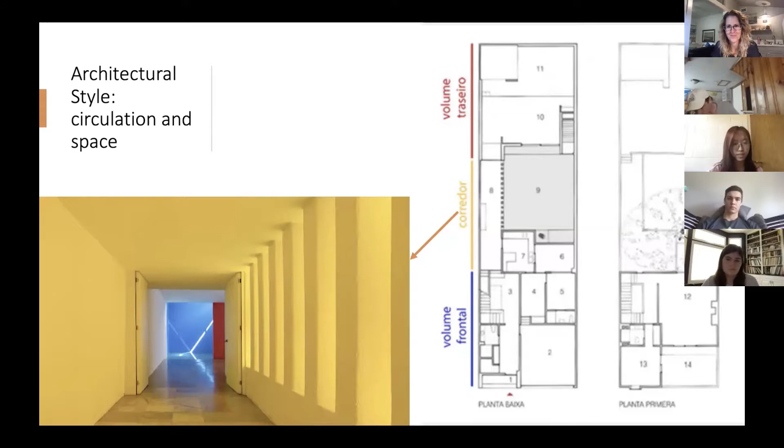Another feature in this house is the stairways. The stairway is made up of pine boards and leads to a door that is always closed. The stair is very sturdy, but its visual delicacy is such that to ascend it seems possible only if a gradual weightlessness was achieved.

Nowadays, most of the work by Luis Barragán has been turned into museums. When I did my research, I found a pretty interesting video called 'Dancing Through the Architecture of Luis Barragán.'

In 2018, Casa Luis Barragán hosted a body bending dance troupe who twist and move through the geometric building's colorful spaces and rooms. I really like this video because it shows how the light, colors, and dancers' bodies cooperate with each other in this site. It also illustrates a dialogue between the human body and nature, and reminds me of what we learned before in class about how blocks and concrete relate to the human body. That's pretty interesting. If you're interested in Luis Barragán's architecture, I strongly recommend this video.

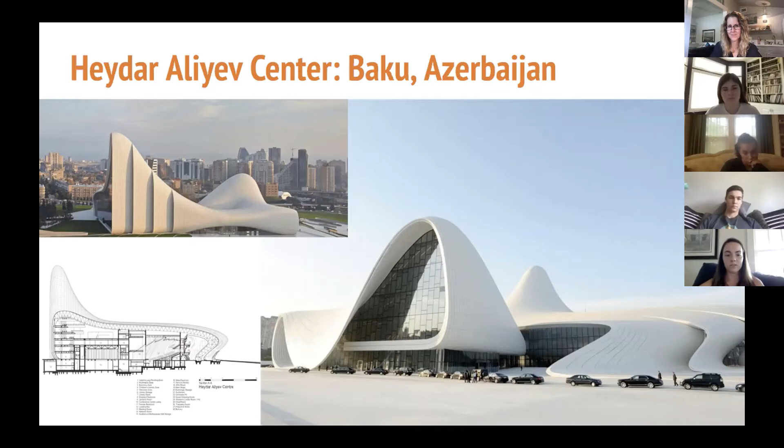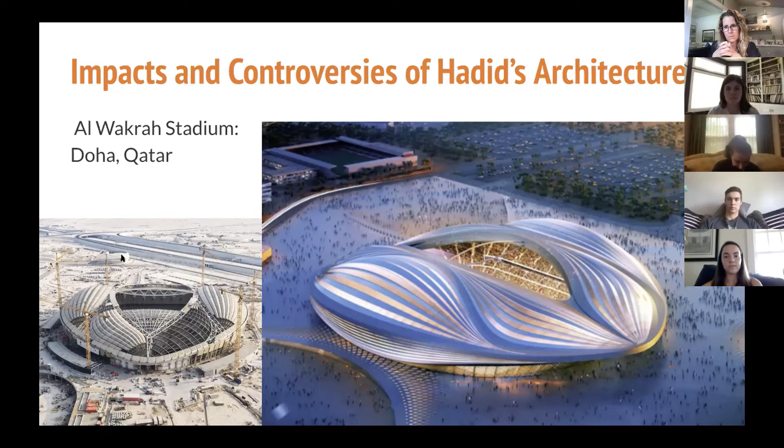Okay, and now for her legacy. Other notable buildings that we did not have time to discuss include, sorry about the pronunciation again, the Guangzhou Opera House in China, the Sheikh Zayed Bridge in the United Arab Emirates, and also the Eli and Edith Broad Art Museum at Michigan State University. So she even made her way into the United States and many countries throughout the world, and continents as well.

So she clearly is legendary, as you can see from her architecture. Her ability to shape concrete into this soft, fluid form is truly incredible. She shaped geometry's new identity and had such an important emphasis on nature and the environment, seen in her environmentally friendly buildings and her wave-like structures that continue to repeat in her work.

She was so focused on her work that she actually never got married. And despite her criticism, she had an immense amount of success as an Iraqi woman in a very white male-dominated field. I credit her for her confidence and strength throughout it all, because it must be really tough. She was also able to design 950 projects in 44 different countries, that's so many. That's truly incredible. Many of you, if you've ever traveled, may have seen some of these buildings.

And she was not only an amazing architect, but she also fought for her rights. She once said that architecture is no longer a man's world, that the idea a woman can't think three-dimensionally is ridiculous. She also said, "Your success will not be determined by your gender or your ethnicity, but only on the scope of your dreams and your hard work to achieve them." So that's it, and thank you guys. I hope you learned a lot.

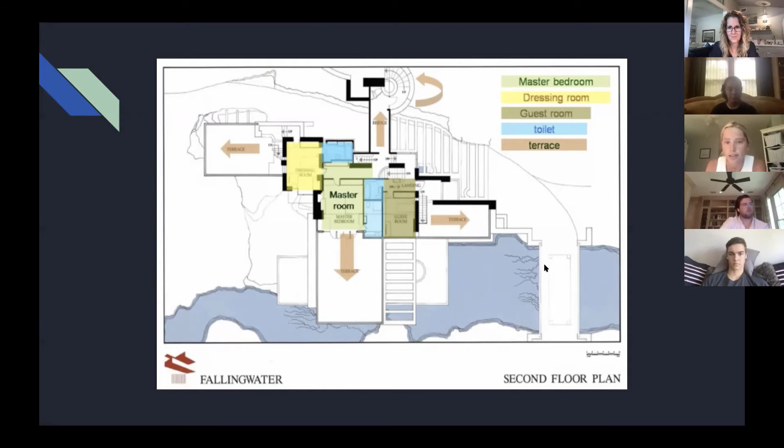I couldn't really find any good pictures that showed this, but you can try to imagine it—this is really open here, but the hallways of this house were very narrow and dark. He did this with the intention to intensify the experience once you got outside, so that getting into an open room or onto the terrace felt more like an opening or an expansion.

You can kind of tell from this photo, but some of the ceilings in the house were only 6 feet 4 inches tall. He did this so that your eye would go forward instead of up, so you're always looking towards the windows in front of you or towards the outside.

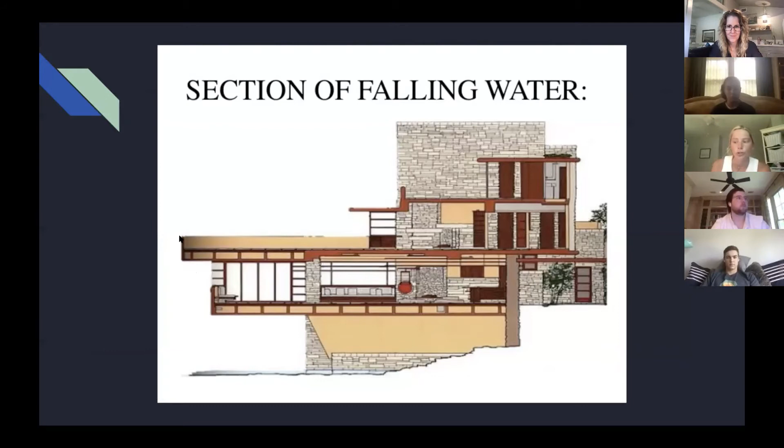As I mentioned before, the house is decorated with several cantilevered terraces—cantilevered meaning it extends out from the actual base of the home. All of these shoot out at right angles, and they added a sense of sculpture to the house while also providing yet another cue to the natural beauty that surrounds it.

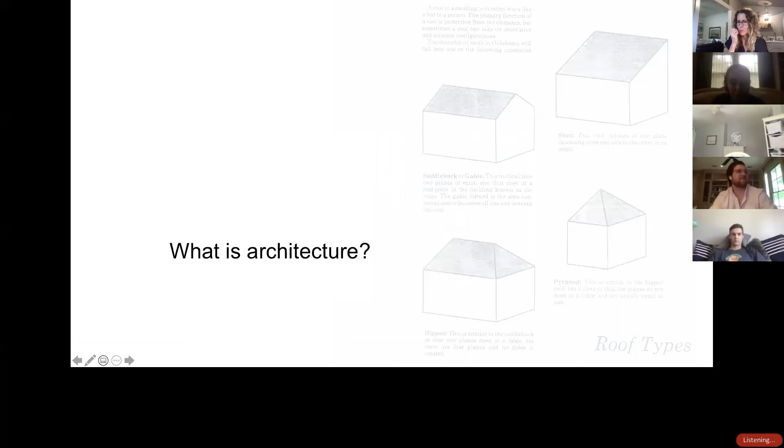Looks like we're going to have subtitles today. Maybe. In the time remaining, I want to take us through a quick jaunt from where we began to where we're finishing with the course.

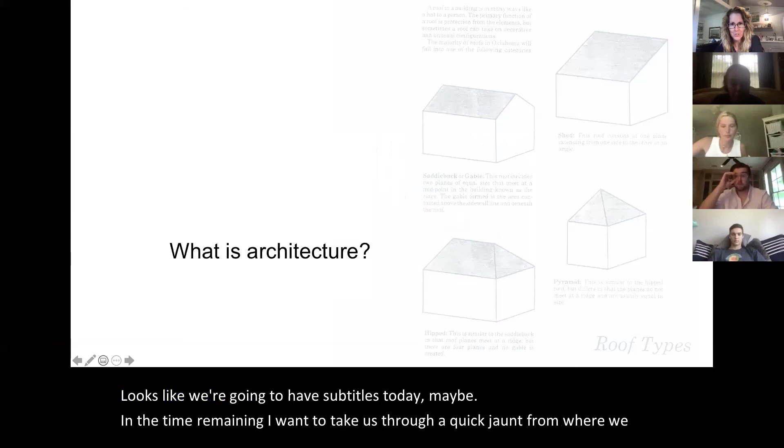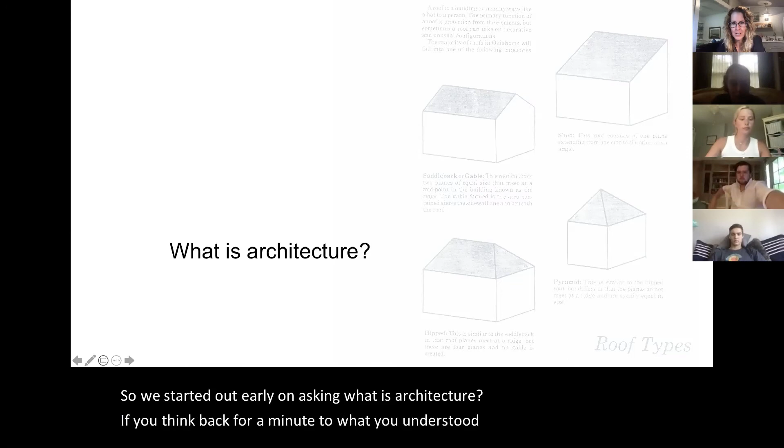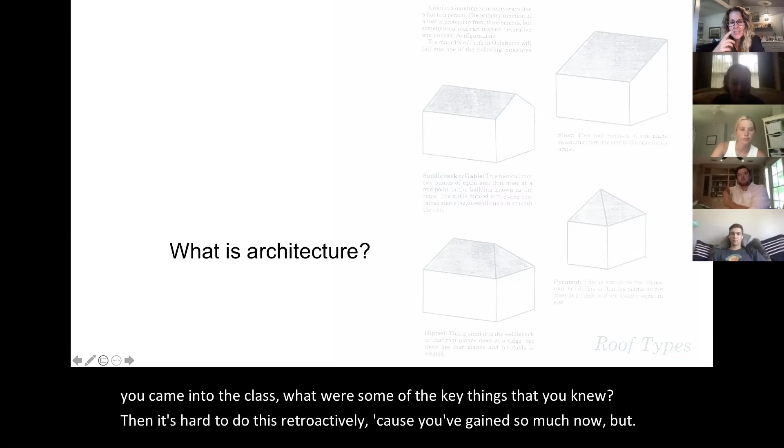So we started out early on asking, what is architecture? If you think back for a minute to what you understood about architecture when you came into the class, what were some of the key things that you knew then? It's hard to do this retroactively because you've gained so much now, but in the answer to what is architecture, do you remember what your first points were generally?

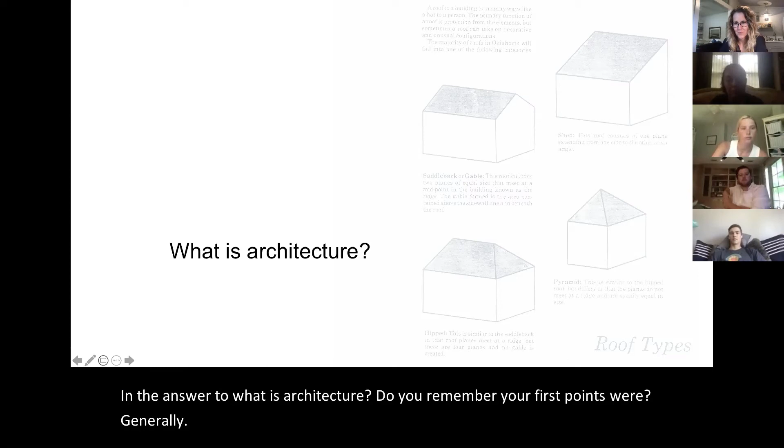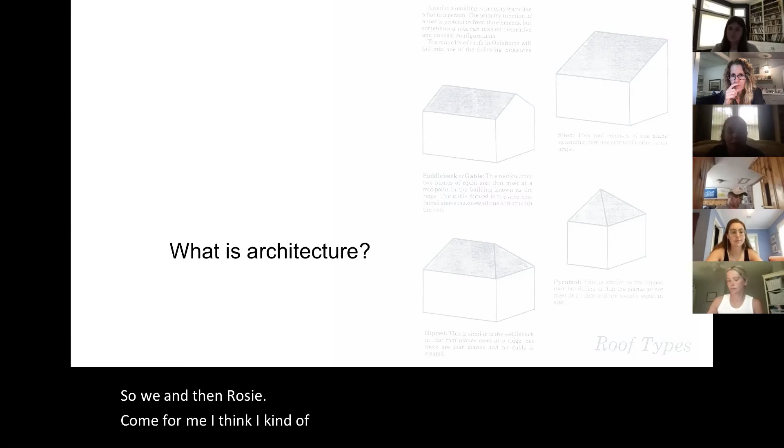Yes, Sophie, and then Rosie. For me, I think I kind of just thought about it as a place of shelter, and sometimes it could be more of an artistic element, but most of the time it was just more for basic purposes that served as a workplace or home.

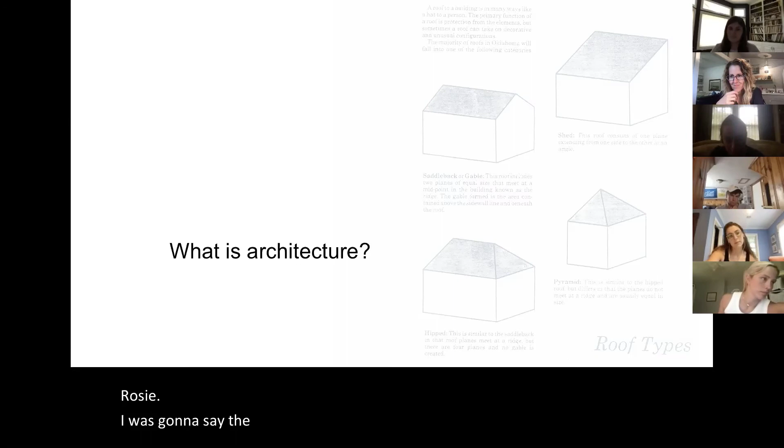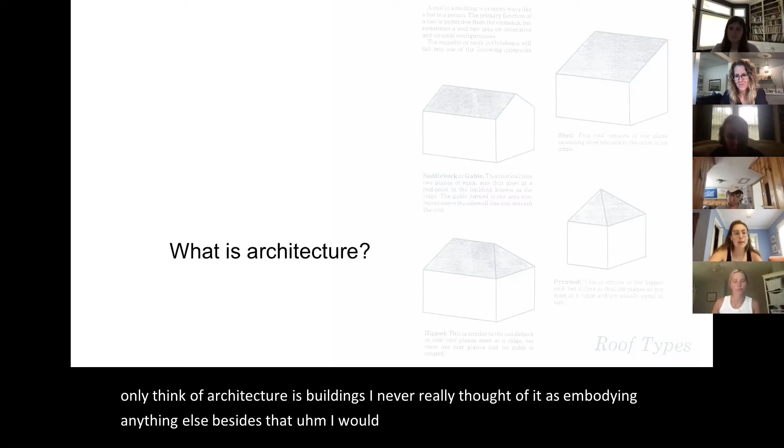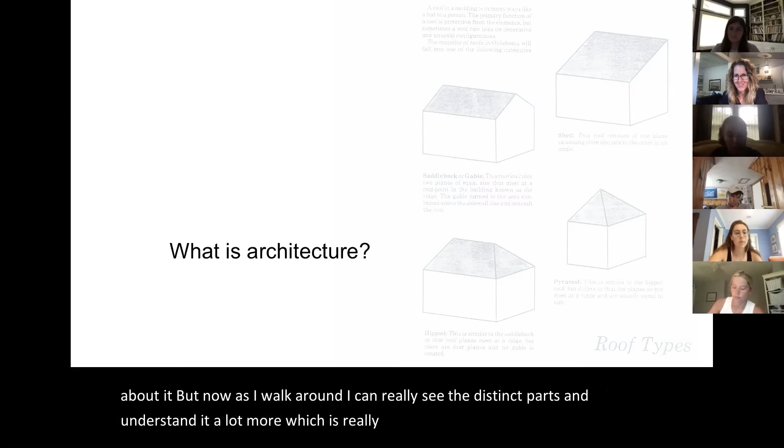Right, great. Rosie? I was going to say the same thing. I used to just think of it as a shelter, and I used to only think of architecture as buildings. I never really thought of it as embodying anything else besides that. I would just pretty much never look at the elements, I would just walk around and not really think about it. But now, as I walk around, I can really see the distinct parts and understand it a lot more, which is really cool. But yeah, before it was just pretty much a habitat, a shelter for a person that they live in. I used to not really think much more besides that.

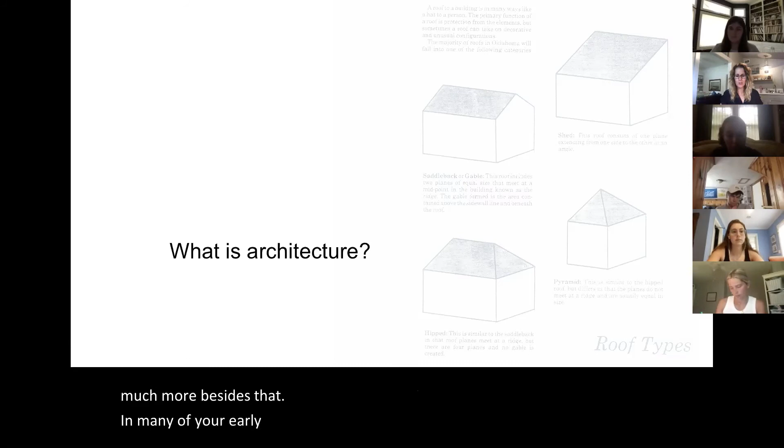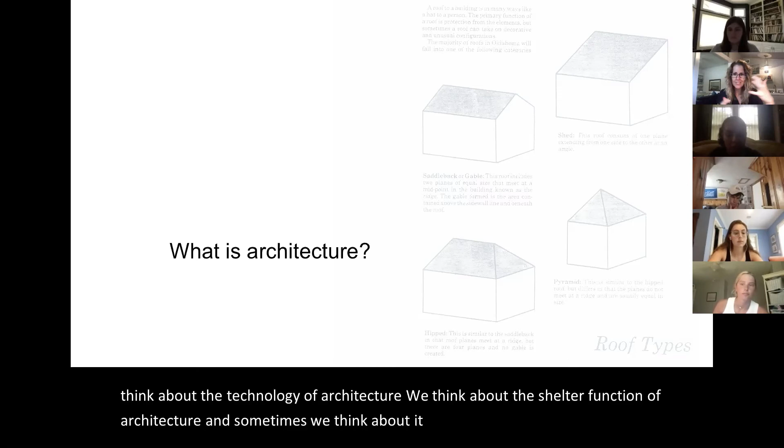In many of your early responses, there's often a tendency to think about the technology of architecture, the shelter function of architecture, and sometimes we think about it as art, but without really fleshing out what that kind of art is.

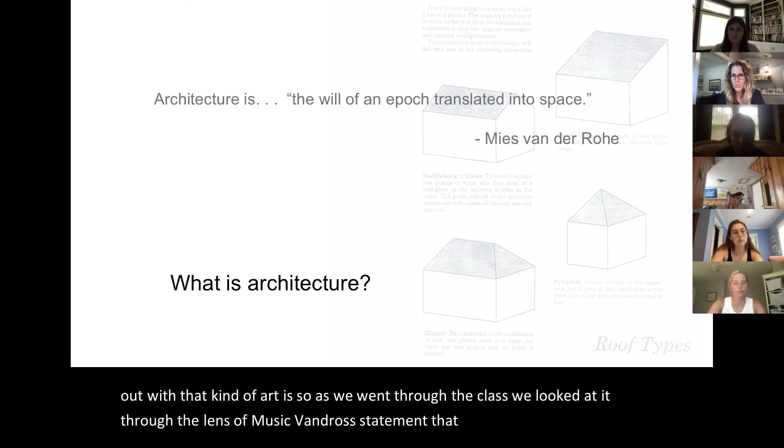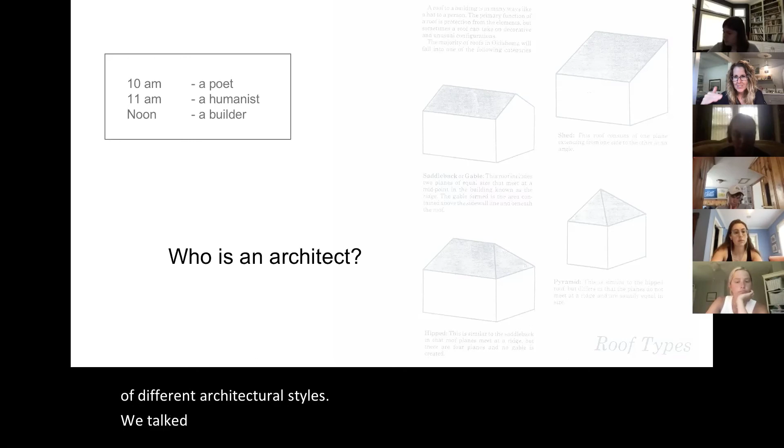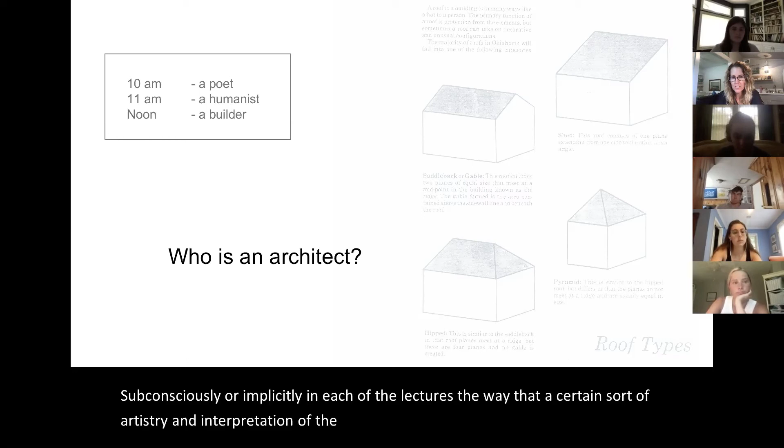So as we went through the class, we looked at it through the lens of Mies van der Rohe's statement that architecture is the will of an epoch or a time period translated into space. And we've seen that through a variety of different architectural styles. We talked about, subconsciously or implicitly in each of the lectures, the way that a certain sort of artistry and interpretation of the culture comes into the work of architecture. We talked about it through the lens of reaching out to the people for whom it's built, integrating their cultural traditions. And then we talked about the tech.

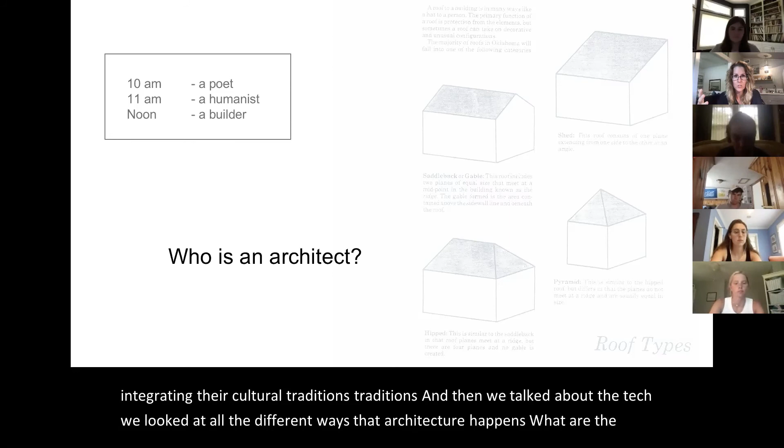We looked at all the different ways that architecture happens. What are the techniques? What are the engineering tools, physics? What's involved in creating architecture in a material dimension? So along the way, we've been thinking about what architecture history is, what it can do.

What are your answers to that question now? What is architectural history? Yeah, Ellen. I think it's like an expression of a culture and their history, and them making it in a way so that it can be preserved and experienced by others in the future. Yeah, excellent, excellent. Lucas.

It's not really a direct answer to the question, but whenever I see architectural history, I just gravitate towards preservation, because we've lost so much of it that we're not able to even really address the architectural history if the architecture still isn't there. Yeah, great point. We've seen that in so many cases, things that have been lost, or understanding that's lost, or histories that are lost, or things that we're not even looking at because it's lost. Or we just don't have time in the class. There's also that possibility. But yes.

Matthew, did you have your hand up, or was it no? Okay, great. We'll keep going.

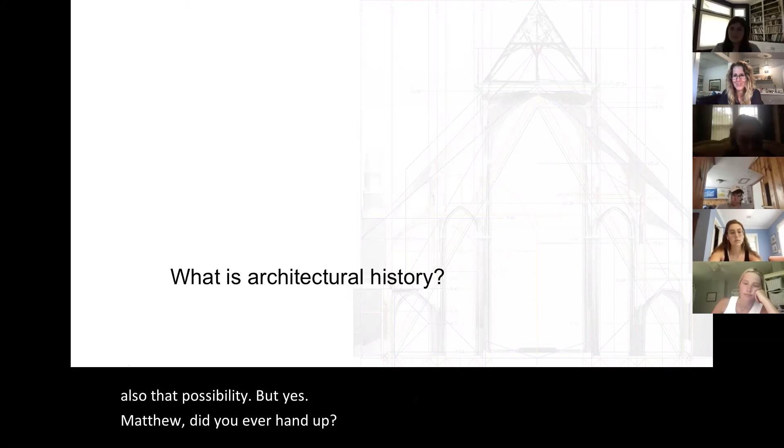Throughout the process, we've been thinking about why architecture matters. And in each of your presentations, you have come to really great conclusions about why that's the case.

From today, thinking about how do we build more sustainably? How do we build in response to the places we're in, whether that's through design elements that reference a culture, through color, through technique.

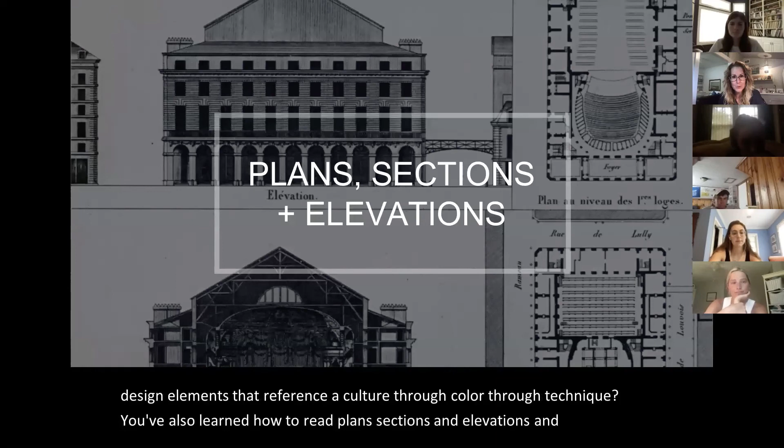We've also learned how to read plans, sections, and elevations. That's a tool you bring forward with you no matter what you do in your life and career, if you decide to build a house in your future, or you simply just need to orient yourself in space.

So now just a quick overview. We went through the awkward teen years of the ancient pyramids as they moved from a mastaba into the glorious pyramids of Giza as we think about them now.

We looked at the marvels of chthonic architecture, both in Petra, Persepolis, and elsewhere, thinking about how architecture can be tectonic in the case of things like the pyramids, and chthonic in other regions of the world where cliffs and valleys are more predominant.

We looked at mud and earth as architectural materials to create buildings beyond what at least I thought was possible before learning about them, and how they reflect the culture, how they reflect the materiality in a place that looks like there aren't many building materials. There certainly always are.

We thought about carpentry and building traditions, specifically through the lens of a series of temples and shrines in Japan and their reference to the city of Chang'an in China.

Looked at pattern and abstraction and the Byzantine plan and the layering of culture and the layering of expression, from religious expression to just a human desire to create a space that says more than we're able to technically communicate with words.

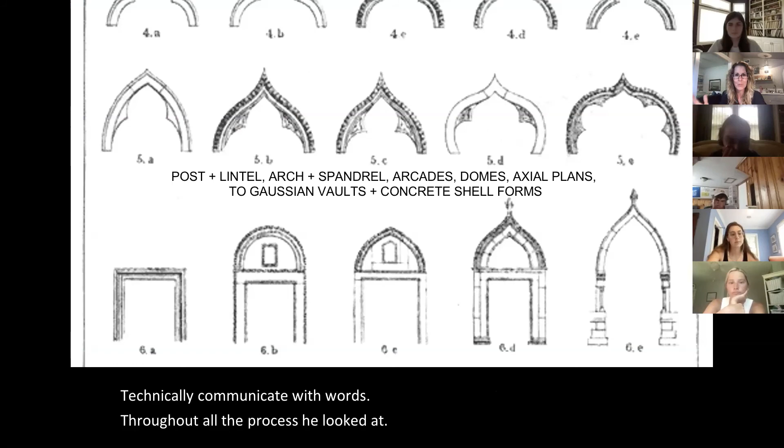Throughout all the process, we looked at the building of architecture: post and lintels, arch and spandrel, arcades, domes, axial plans, Gaussian vaults, concrete shells.

We stopped to think through the construction of race and its relationship to architecture and the call for equity, from everything from the current protests to the architecture of sugar.

And we fast forwarded through the evolution of the cathedral plan, from the Romanesque to the Byzantine to the Gothic.

What I'm starting into now are the points that will be on your exam. So we'll look at this later part. You won't have to do the Romanesque because you've already done that, but the Gothic happened in this latter part of the session.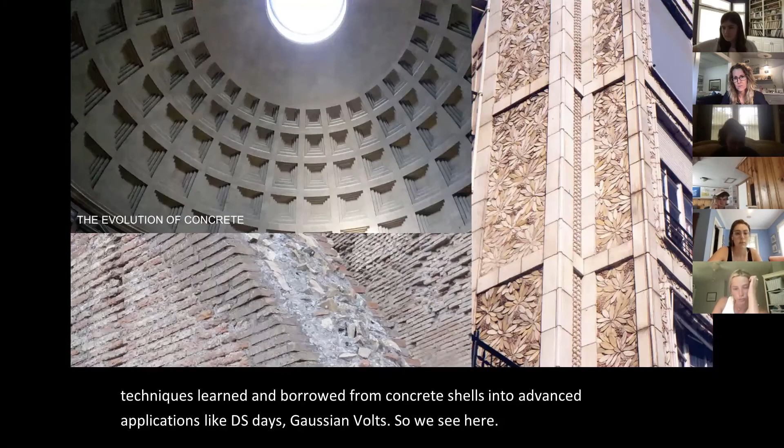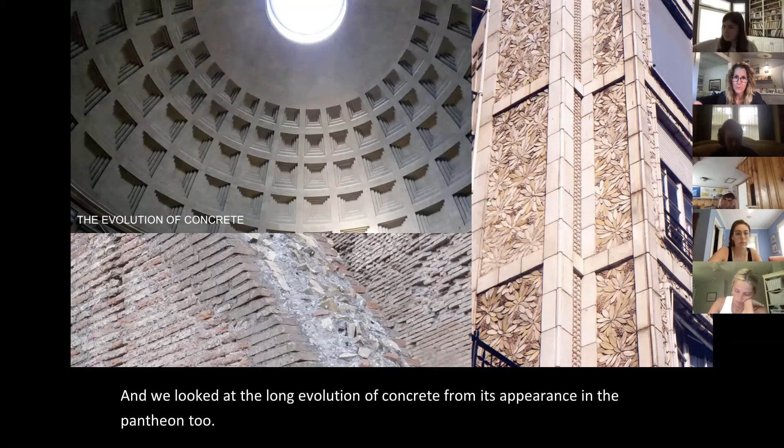And we looked at the long evolution of concrete from its appearance in the Pantheon to the work of Perret and Maillart in really advancing what concrete could do in the early 20th century.

And then today, to wrap up, we are going to look briefly at textiles, tensiles, and the Atoms for Peace project.

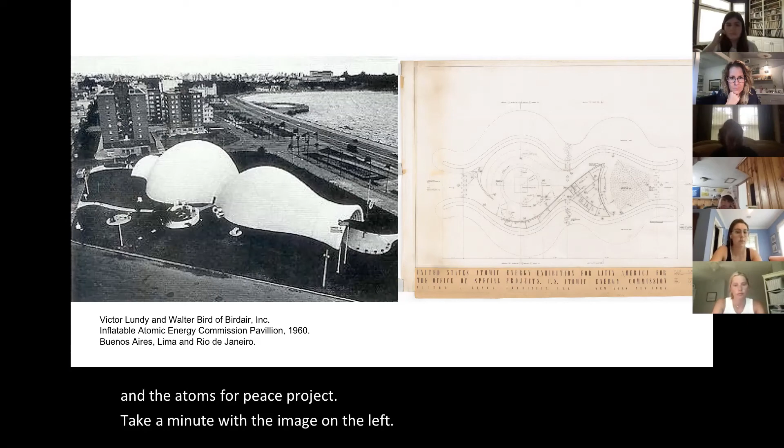Take a minute with the image on the left. What do you see when you look at it? What does it remind you of, if anything?

Meredith said it kind of looks like if you took a vase and just cut it in half and laid it on its side. Ellen agreed, saying she was going to say the same thing, that it looks like a vase that was knocked over.

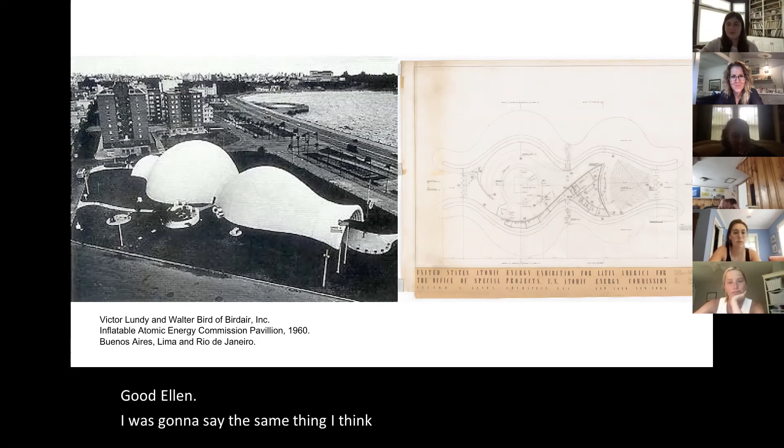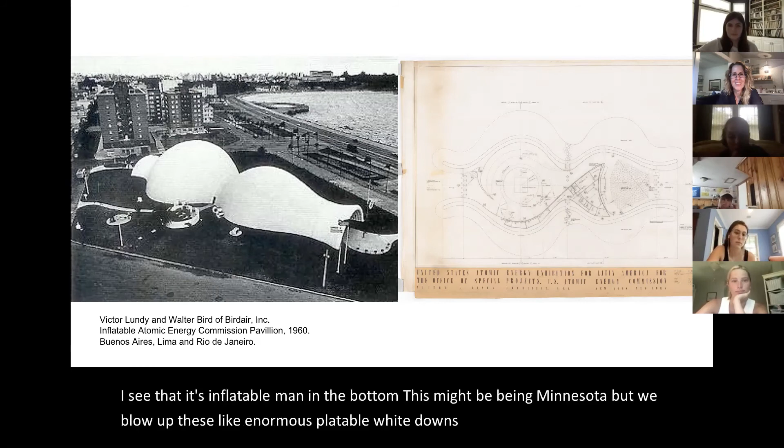Lucas said he sees that it's inflatable down on the bottom, and mentioned that in Minnesota they blow up enormous inflatable white domes over football fields in the winter and heat them to play sports, which this reminds him of, except theirs aren't as curved, more like a giant igloo.

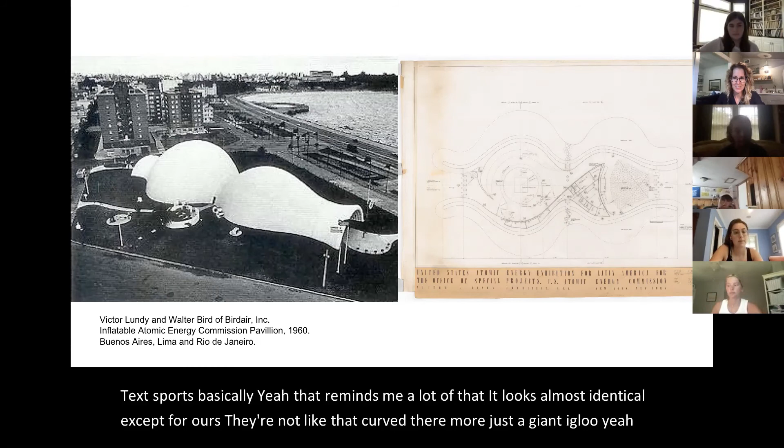So we have this vase structure, and I'm guessing, Ellen and Meredith, that comes in the form of the curvature of this structure.

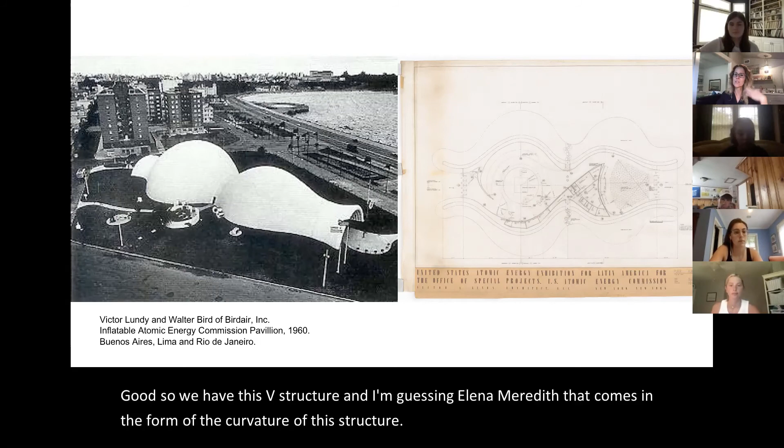Is there anything else that you see in this building? There are a million things you could see in this building, but when you think about the form, does it remind you of anything else?

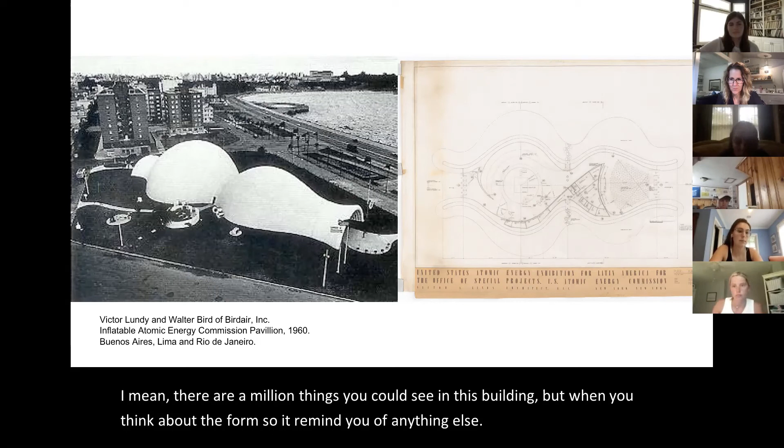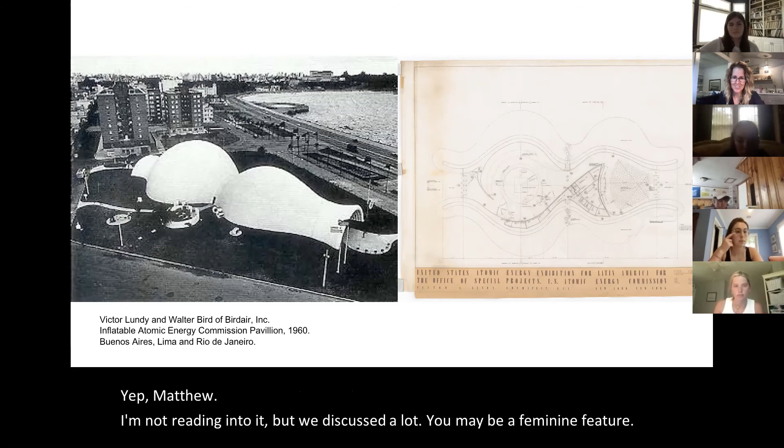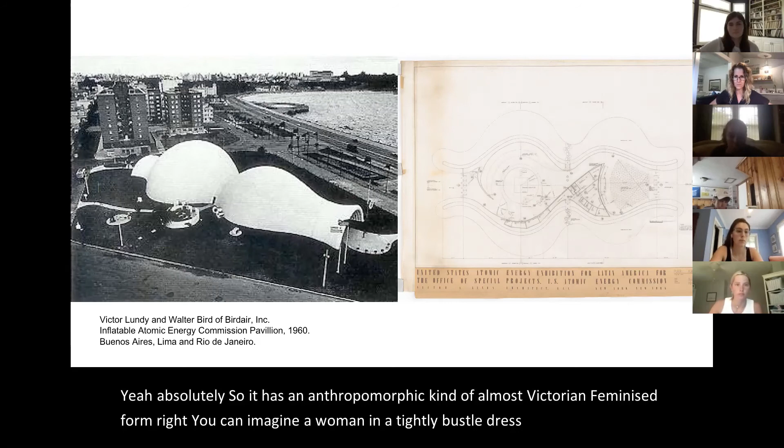Yeah, Matthew, I hope I'm not reading into it, but we've discussed a lot. It may be a feminine feature. Yeah, absolutely. So it has an anthropomorphic, kind of almost Victorian feminized form, right? You can imagine a woman in a tightly bustled dress with a tight waist and this skirt coming out of the bottom. Absolutely, and all of those readings are intentional.

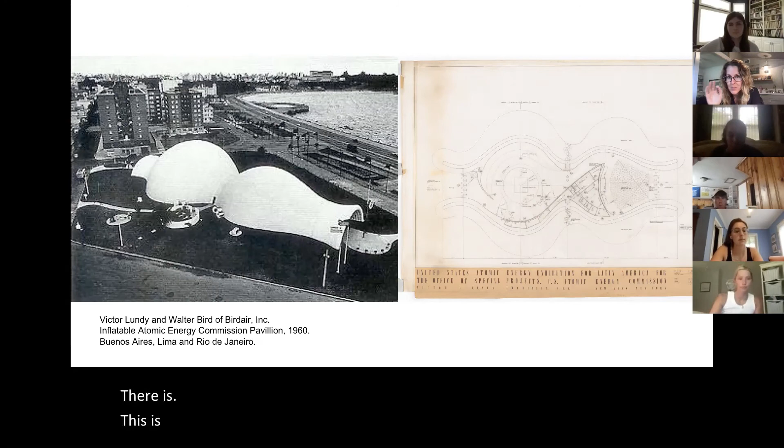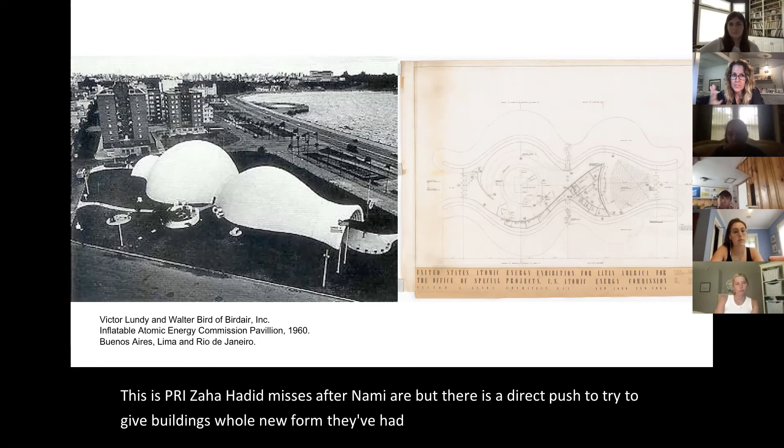This is pre-Zaha Hadid, this is after Niemeyer, but there is a direct push to try to give buildings a whole new form than they've had before, moving away from the squares and rectangles that you see in the background of the image to something entirely new, something perceived as almost living.

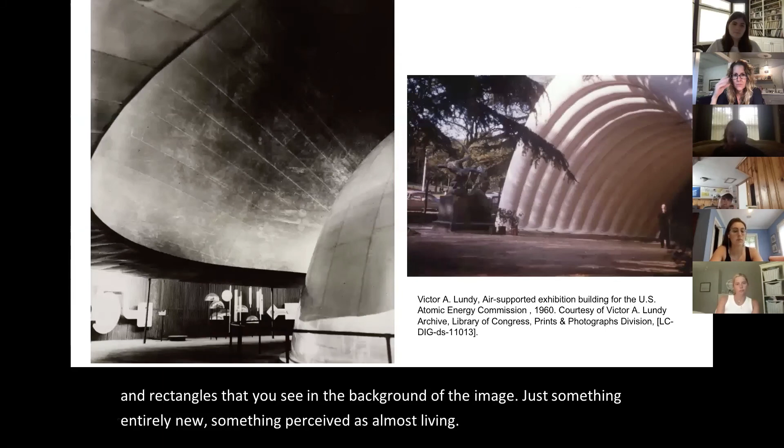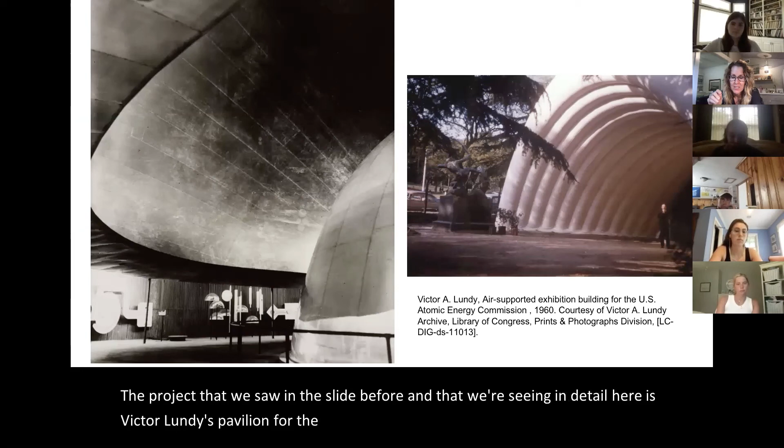The project that we saw in the slide before and that we're seeing in detail here is Victor Lundy's pavilion for the Atomic Energy Commission, designed to showcase the Atoms for Peace project. Have you ever heard of the Atoms for Peace project?

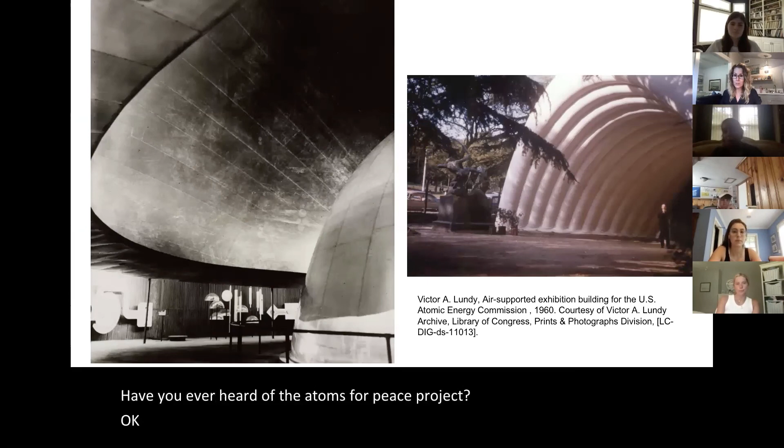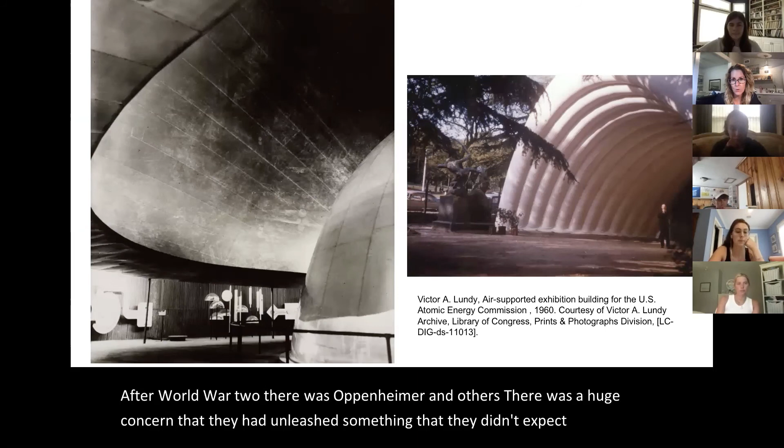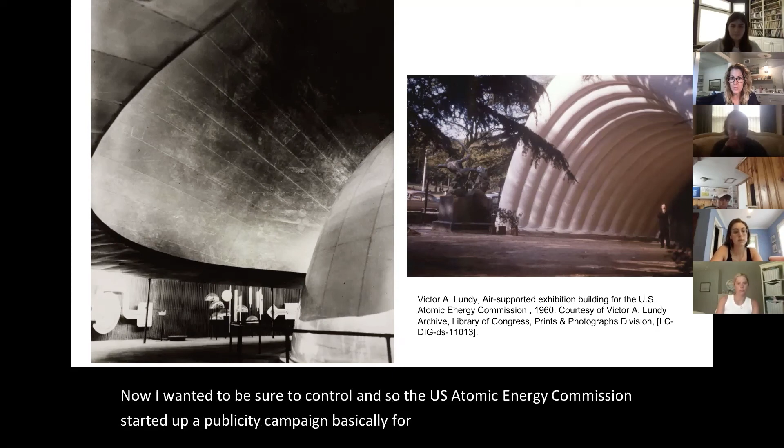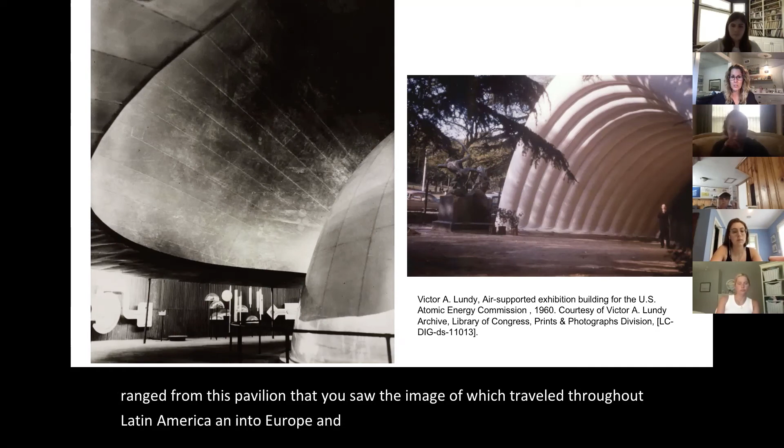After World War II, there was Oppenheimer and others, there was a huge concern that they had unleashed something that they didn't expect, and now wanted to be sure to control. So the US Atomic Energy Commission started up a publicity campaign basically for the good uses of atomic energy. This ranged from this pavilion that you saw the image of, which traveled throughout Latin America and into Europe. The idea behind the pavilion was to show the power of atomic energy in scientific application, as well as domestic applications.

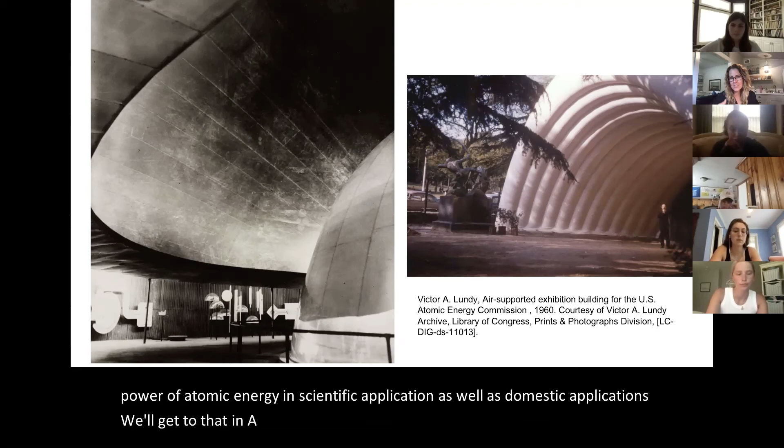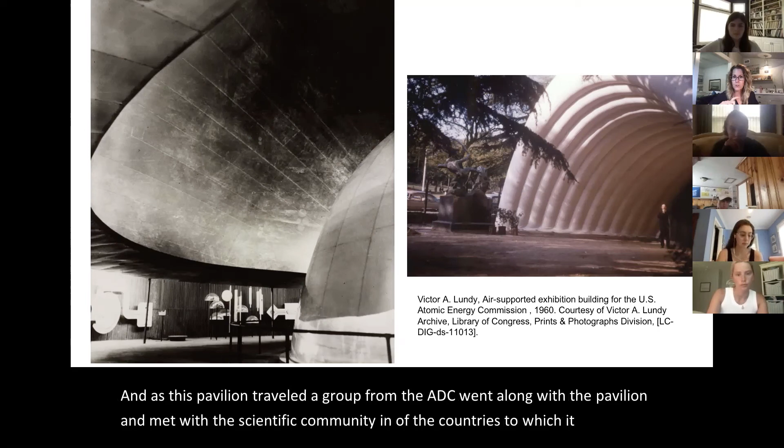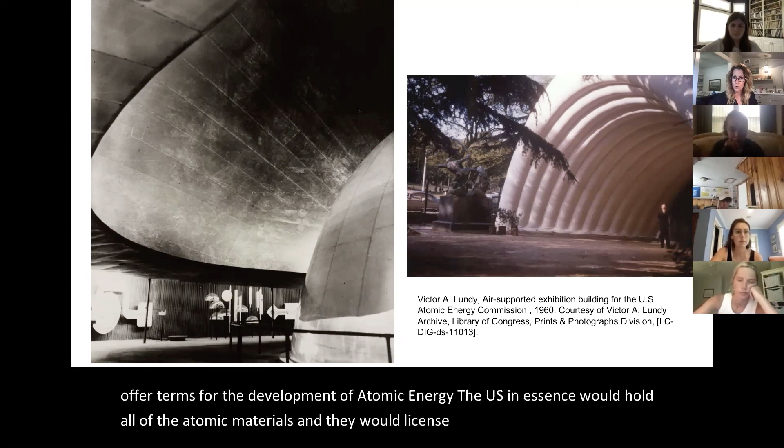As this pavilion traveled, a group from the AEC went along with the pavilion and met with the scientific community in each of the countries to which it traveled to offer terms for the development of atomic energy. The US, in essence, would hold all of the atomic materials and they would license them to the different states who were willing to get on board. It was an early way of trying to control proliferation and to put America at the center of that proliferation discussion. So what does that have to do with Lundy's shape?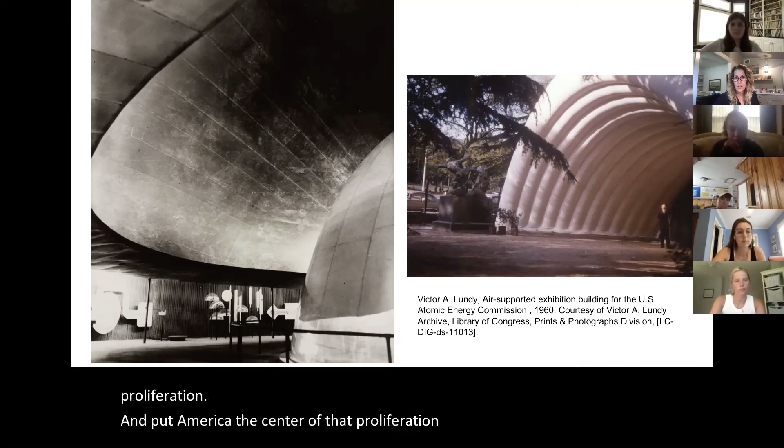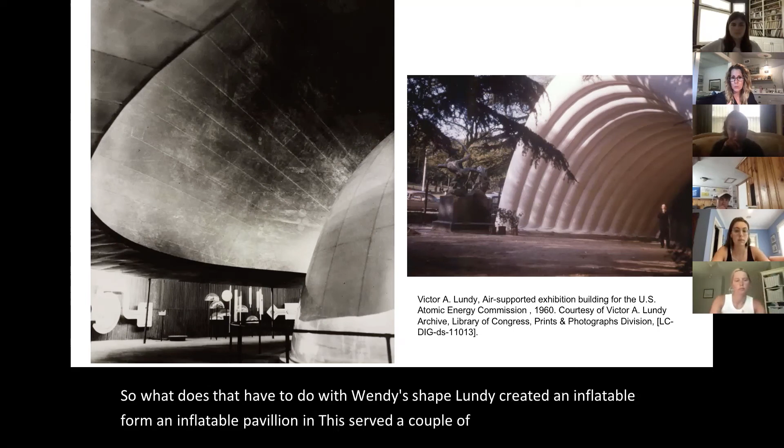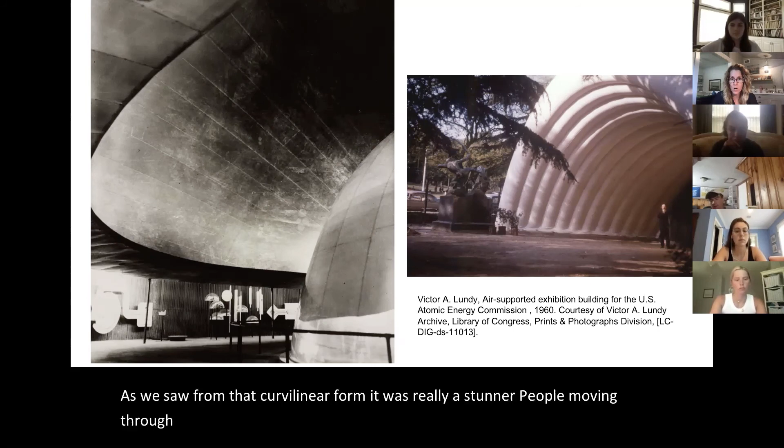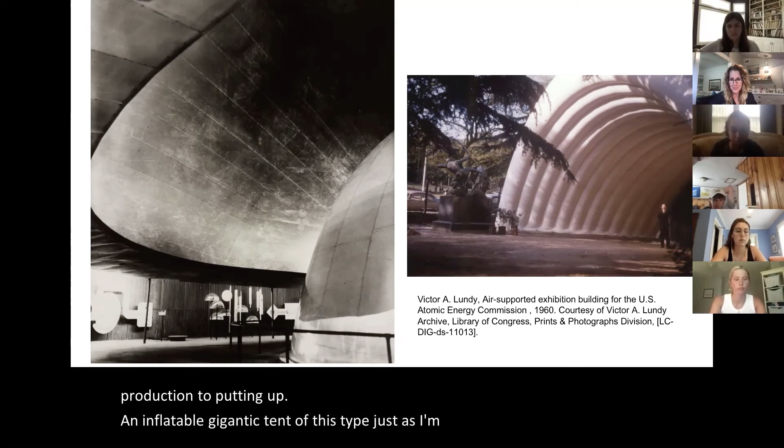Lundy created an inflatable form, an inflatable pavilion, and this served a couple of purposes. One, it could be put up and taken down quite easily. As we saw from that curvilinear form, it was really a stunner. People moving through the city would be drawn to know what this thing is, and there's a production to putting up an inflatable gigantic tent of this type. Just as I'm sure you've seen, Lucas, when they start to put them up as winter comes, it's almost like a growing body that is emerging from the ground and rising up above the surface for whatever coverage needs to happen inside.

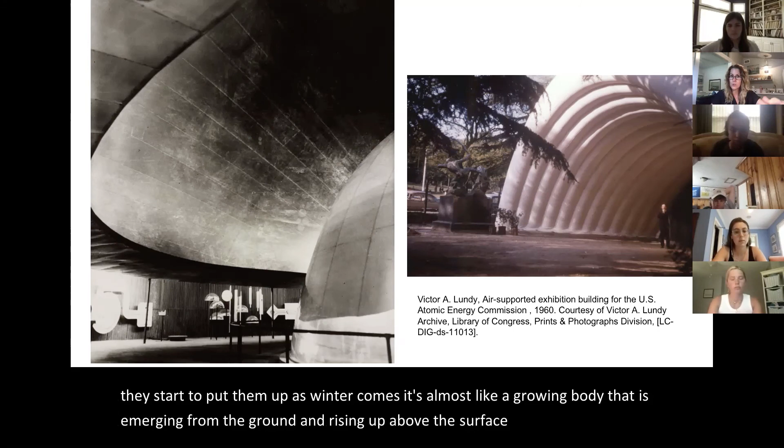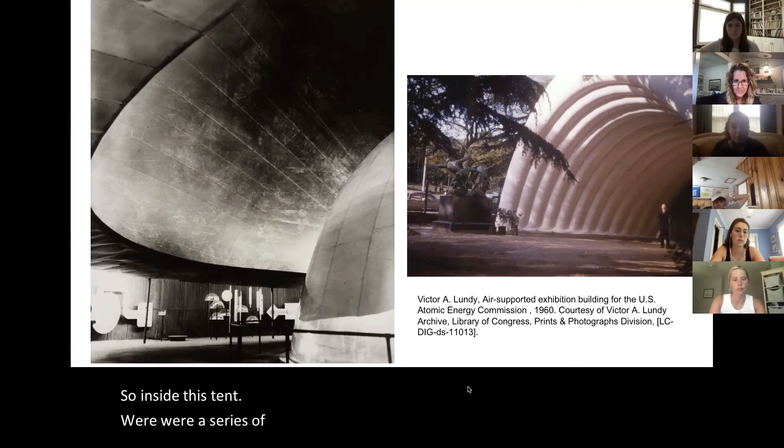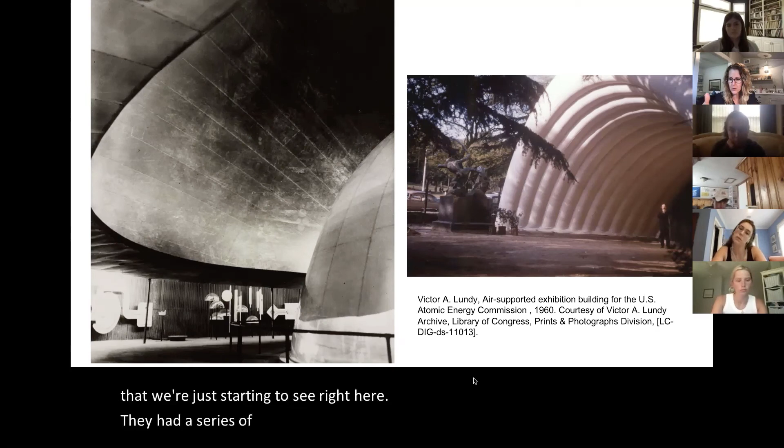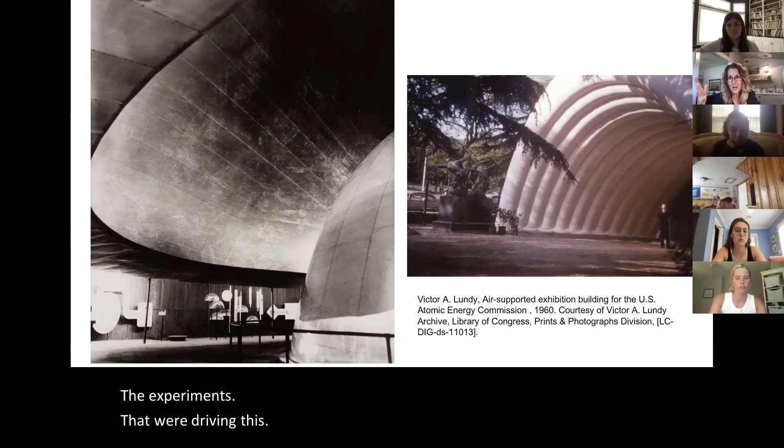So inside this tent were a series of exhibitions you can see on the left. And then in this dome that we're just starting to see right here, they had a series of radiated samples so that you could get close, but hopefully not too close, to the experiments that were driving this propaganda machine, driving the development of atomic energy, and driving this international collaboration as well.

You can imagine the problems with this, sending radiated material to homeowners. It was low dose radiation, but nonetheless, it's not something that anyone would suggest that you try at home today. The idea at the time, and the scientific community as well as the media, went wild about this. The idea was that through the use of radiation, we could make places like the North Pole warm, forested, habitable areas, or we could transform plants and animals into larger, better, bigger versions of themselves.

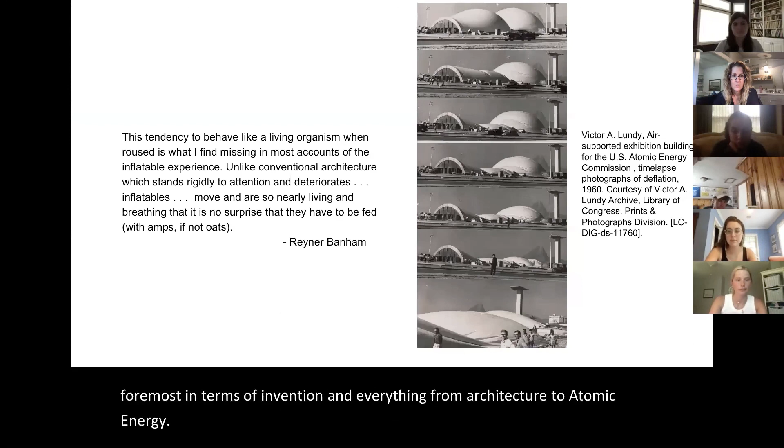The famous architecture theorist Reyner Banham has written about Lundy's work, and he really saw it as creating something of a living organism out of architecture—something that before was a piece-by-piece process could now breathe and grow into a living shape. This became a whole new way of thinking about building homes, temporary structures, pool covers in cold places, and covering stadiums.

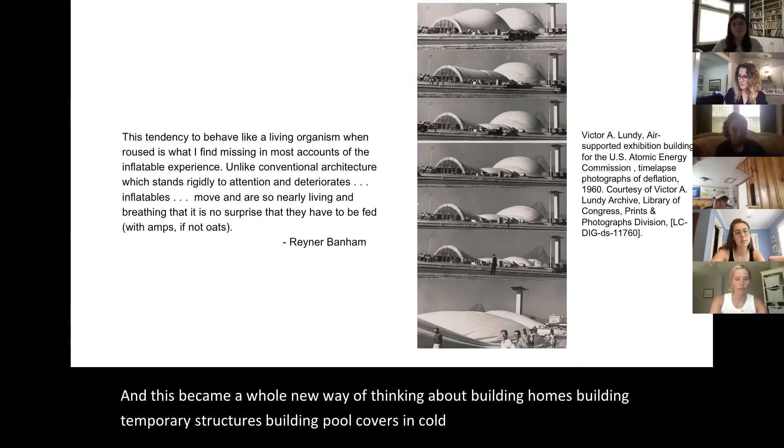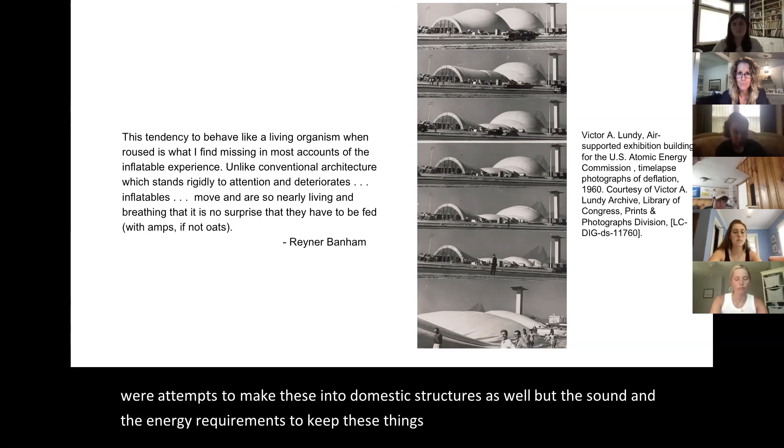There were attempts to make these into domestic structures as well, but the sound and energy requirements to keep them inflated—if you've ever been to a bouncy castle, you know that loud noise going on in the background—was too much, and they were unsuccessful for most applications, but not all.

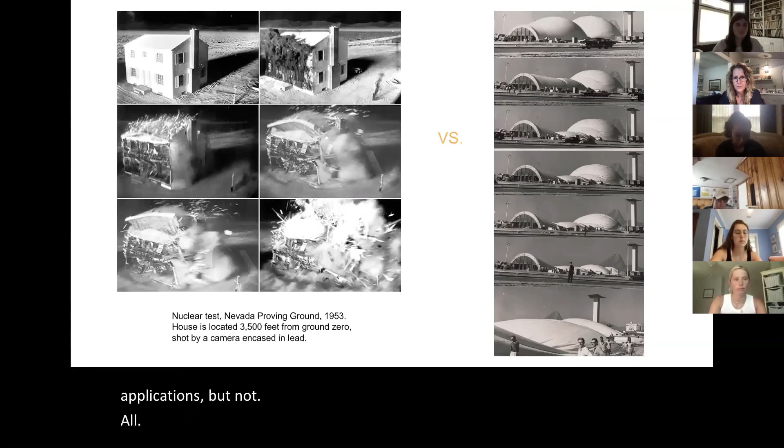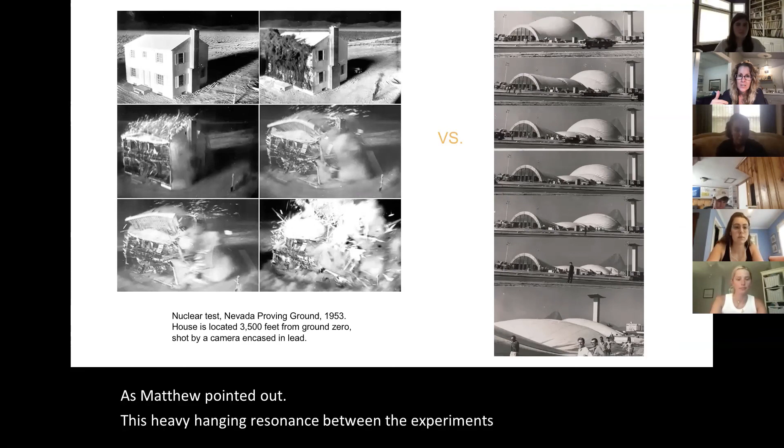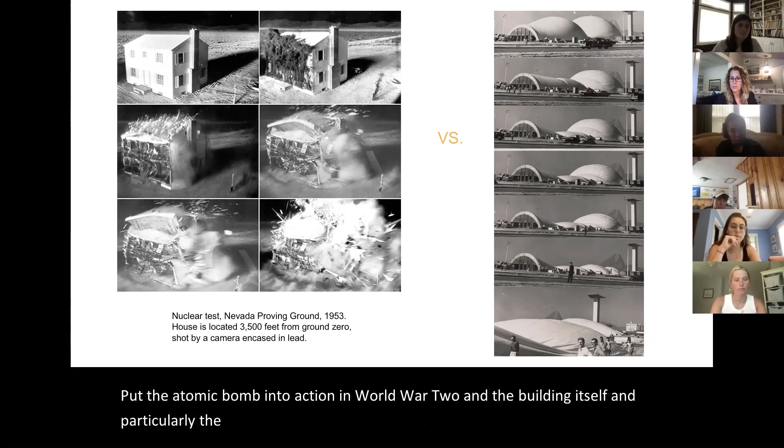As Matthew pointed out, there's this heavy hanging resonance between the experiments that went into putting the atomic bomb into action in World War II and the building itself, particularly the pavilion's purpose in terms of controlling access to atomic energy.

And in a way this takes us full circle from thinking about the materials in one's environment, how to utilize, cooperate with, and appropriate them at the most extreme, into something that can be used for human purposes, whether productive or destructive. What we see in Lundy is a leap toward what's called command control architecture—the tendency to do just what it says, command and control, through human ingenuity and mastery.

That's really where this conversation ends and begins in a way. Moving through architecture history, the 20th century desire to master nature, to put it under human control, to feel like we had power over all materials for our own good, has recently been fully challenged by the coronavirus—a microscopic element reminding us that we are not in control and not all things are at our command. It probably will pass; let's hope in short order for everybody's sake. But it's one of those reminders that we are human, in our best capacities and also in our frailty.